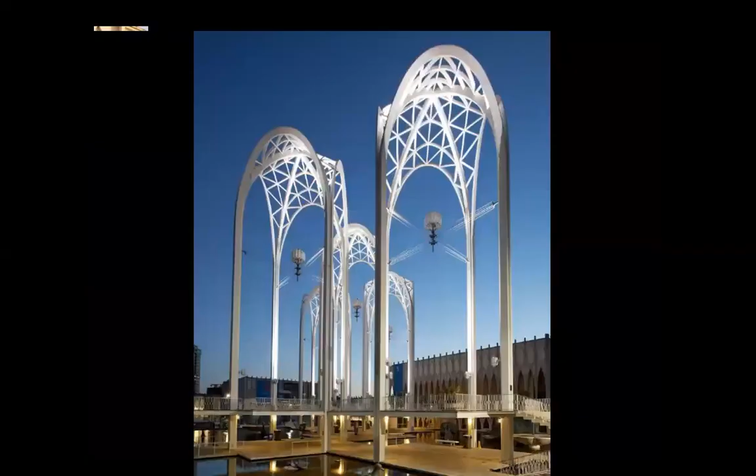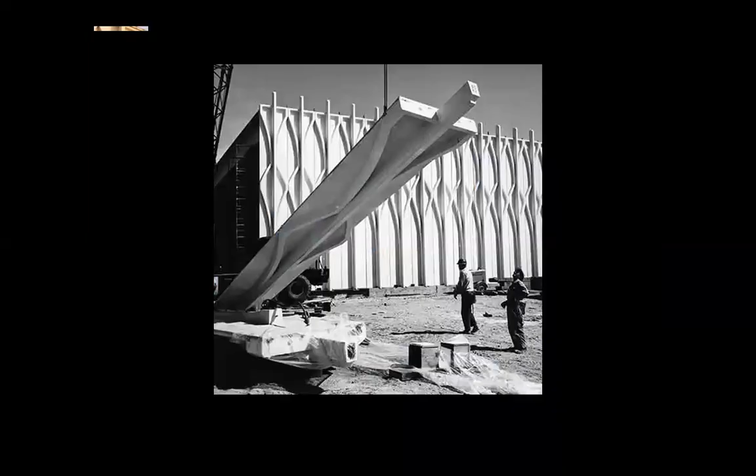And these strange things, how are we to interpret them? What do they mean? Could we call science the new cathedral or the new religion? Did Minoru Yamasaki think of these matters? I don't know. Anyway, he built them. You see, they are prefabricated. They are huge.

Also, I think it's worth pointing out that he was a modernist architect, or a modern architect, who didn't turn his back on ornament. Much of his architecture has a lot to do with ornamentation. And indeed, you cannot have structure without ornament. So he was a rather unusual modernist. After all, we read at the beginning that he was associated with a movement, the new formalism, not functionalism, but formalism. This is perhaps something worth thinking about.

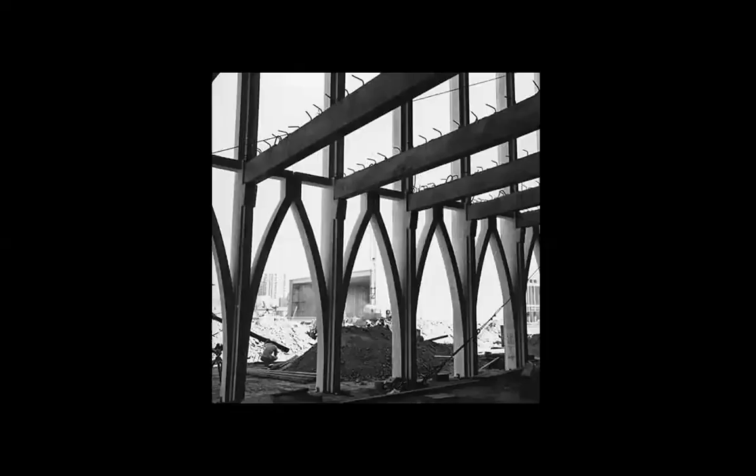In other words, he was a new formalist. Now, I don't know who the old formalists were. He was considered one of the new formalists, like Edward Durell Stone as well. Is there logic in his work? Yes, there is. But there is also the ornamental side of his work where logic becomes less adequate to use.

In the 60s, the United States was doing very well. There was some optimism that the United States is saved and will save the world, and the architecture had to be splendid. Although there was and will be a lot of poverty in the United States, these mega projects don't say anything about poverty, like that national life building project. Looking at that building, you'd say there's no poverty in the United States, but I lived there for many years and I know there is a lot of poverty. That poverty is not shown on TV, not shown through the red carpet of Hollywood or through the movies from Netflix or HBO.

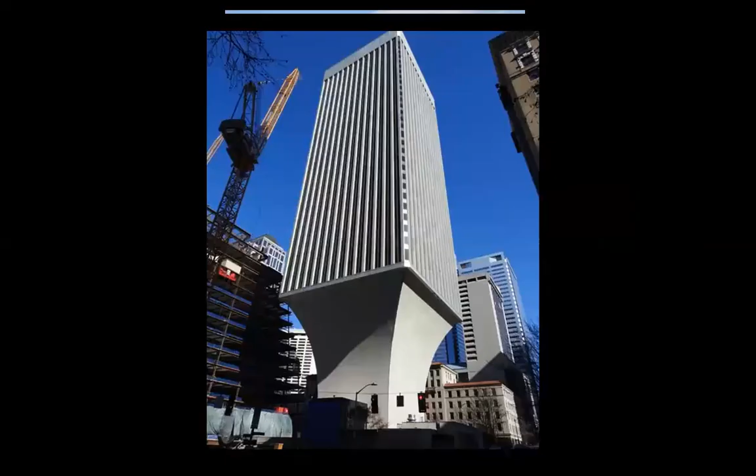The human beings were just small insects in their shadows. Rainier Tower, Seattle, 1977. This one at least is adventurous at the bottom, maybe too adventurous. I'm sure certain engineers in our country, and maybe not only in our country, would protest. But anyway, he elevated this huge prism on top of that base, which is kind of a pedestal that could make one tremble a little bit considering the scale. A strange building, really, by all means.

Because usually at the low level, you try to open up towards the street, towards the life of the street, towards people. But here, this pedestal, at least from this level up, is opaque. I don't know, it's strange, and obviously it requires some engineering acrobatics. He did it, because the triumphalist ideology of the United States at that time was almost without limits. So all the money in the world was there, and why not build in this way? But it does look strange.

You look at this first floor or ground floor, which is so pedestrian and dwarfed by this massive thing. This is truly huge. And then the true hugeness happens from here upwards. Very, very strange buildings. I wish I had more pictures to agitate me even further.

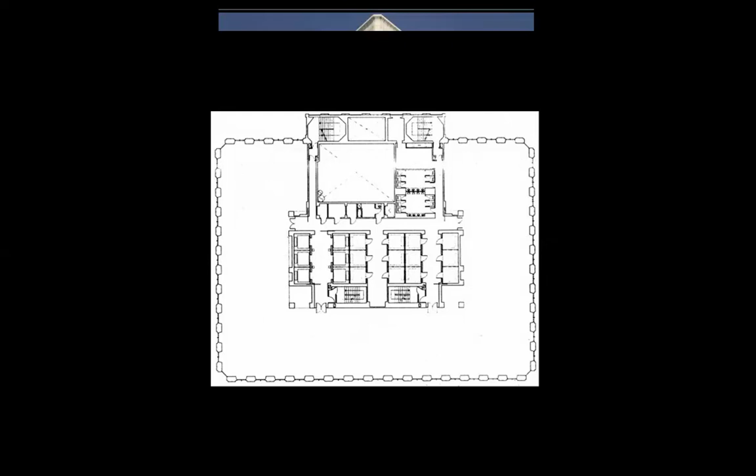The plan, as I said, is the typical office tower with circulations in the center - elevators, restrooms, staircases, and so on.

I was surprised to read a few days ago that Thom Mayne, the celebrated North American architect who was the founder of his office, Morphosis, stated in an interview that he seemed rather sympathetic towards the terrorists. This surprised me. We're talking about a winner of the Pritzker Prize, a very well-known North American architect, claiming that he doesn't lament the falling of the towers. In a way, he shows some sympathy towards what we call the terrorists stood for.

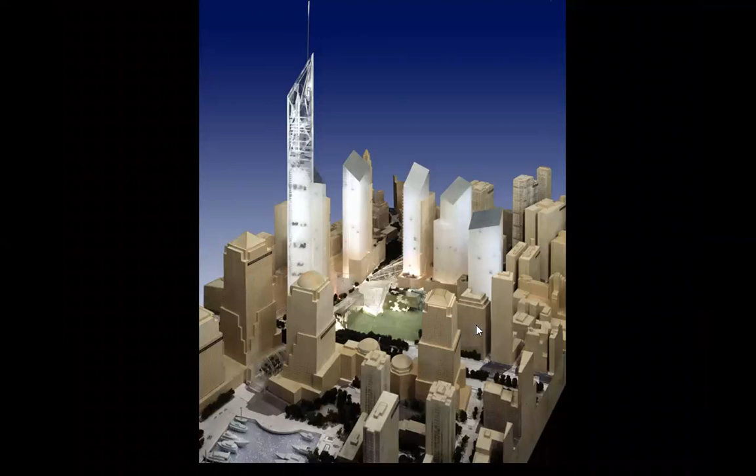Who would build something like this for nothing, in a way, meaning a useless giant pair of structures. Now, this might have been, yes, this one by Daniel Libeskind. He won the competition, but it was not built what he proposed.

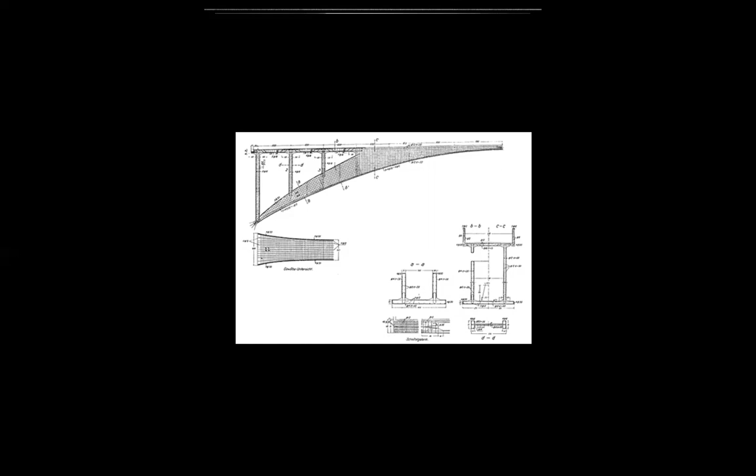Some drawings of Robert Maillart. Engineering drawings, very elegant, because his works are very elegant, very aesthetical. It's where engineering becomes art. And if they were also accurate in terms of calculations, even better.

I had a chance to meet here on Zoom in 2020 a very interesting structural engineer from the United States, from Los Angeles, working for OVE Arup America, Bruce Danziger, and we became friends here on Zoom. A very knowledgeable man about architecture and culture in general, and very sensitive. He worked with some of the best architects in the world for some very important works. Bruce Danziger, yes. I should have invited him today. Although in Los Angeles now it's maybe 9 or 10 a.m. at the most.

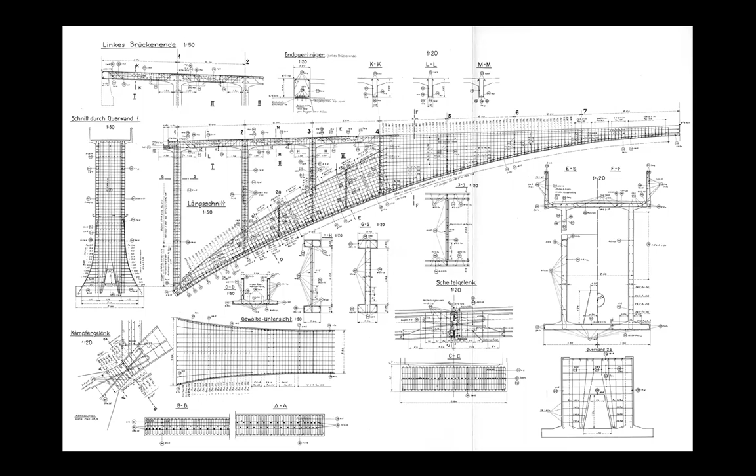Robert Maillart, a sensitive engineer. And we need sensitive engineers, and maybe we need even more sensitive architects. Tavanasa Bridge.

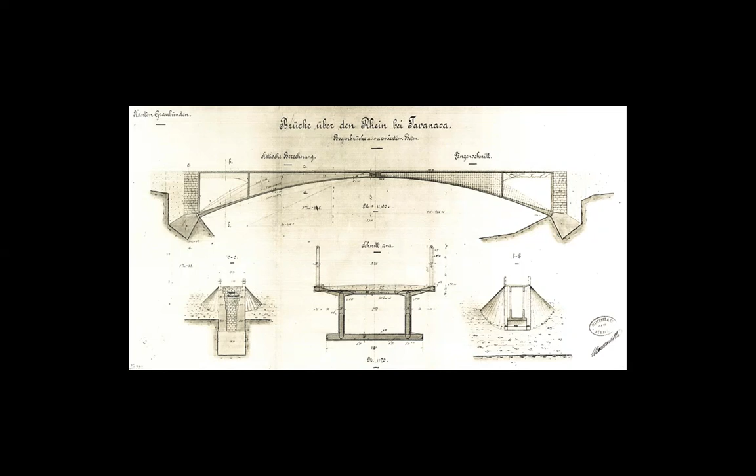Of course, at that time, they didn't employ computers. It was all done manually. Look at the handwriting. Who would write like this on not just an engineering plan, but architectural as well. And yet, forget the font, forget the writing. Look at the work. The built work is resolutely modern, by today's standards as well. The tumultuousness of what's underneath is balanced perfectly by the elegance, the Apollonian beauty of the bridge.

So when the engineer is coupled with a sensitive eye and a sensitive soul, you get such works. Good engineers don't like banal structures. Good engineers, like good architects, want adventures in their field. They want to create something new. So what is new usually requires additional effort, sometimes troubles, rejections.

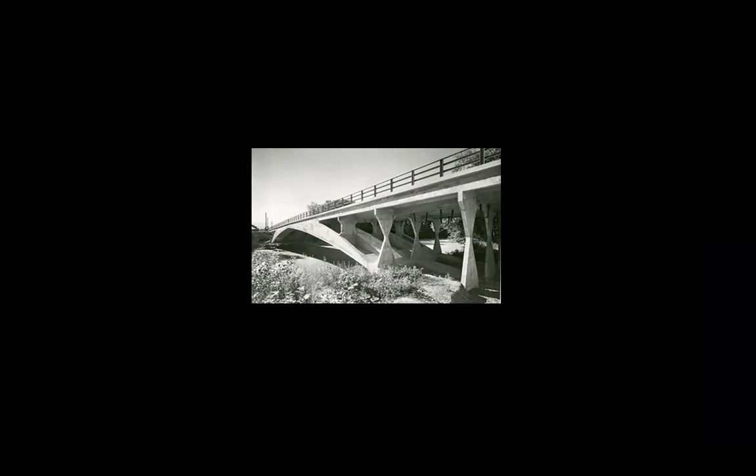It's unavoidable. Another bridge, Arve Bridge. I don't know if it's in Switzerland or not, but even here we see the appetite for aesthetics. Look at those columns. There is complexity here, and there is an artistic complexity. You would say, when you look at this work, that here you had an engineer, but also of course you had an architect. No, in this case, the engineer was the architect. The engineer was the artist.

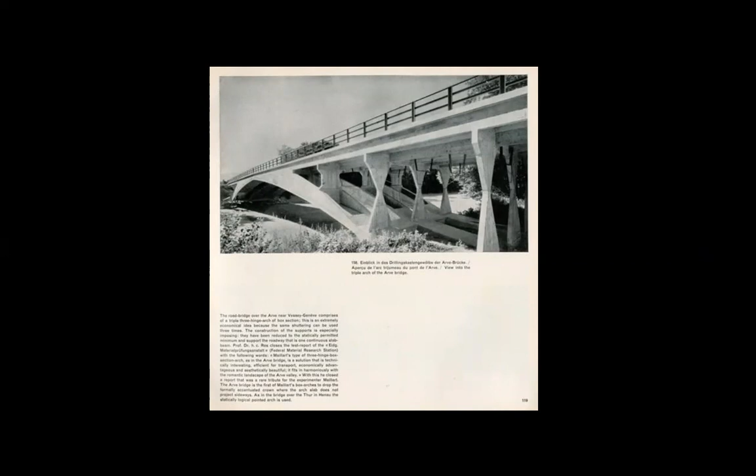Robert Maillart. I wish I knew more about engineering to analyze the work, but I don't. I am very badly equipped for this kind of analysis, but I can appreciate it artistically, aesthetically, very much so. It's literally a sculptural work that happens to unite the two sides of a river. I think Brâncuși should have loved it too.

And by way of bridge, I keep saying that the oldest definition of art that I found, in Proto-Indo-European language, art, as I read in English, art equals bridge equals God. This was the oldest meaning or definition of the word art that I found. Art equals bridge, like Maillart's bridge, and by extension equals God.

Another bridge. I don't know where this is, but he was the king of bridges, no doubt. Just as Hans Wegner, the great Danish furniture designer, was the king of chairs, Maillart was the king of bridges.

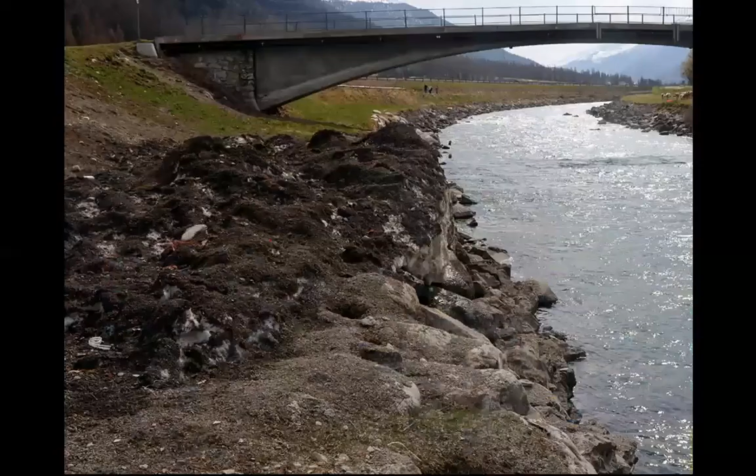Another bridge. We remember a few days ago I made a presentation on a Dutch architect who built many bridges in Amsterdam, but without exceptional engineering works. I'm talking about Piet Kramer. He built bridges as an architect, but from an engineering point of view, they were not exceptional. Here we have an engineer who built bridges with aesthetical virtues, with architectonic qualities.

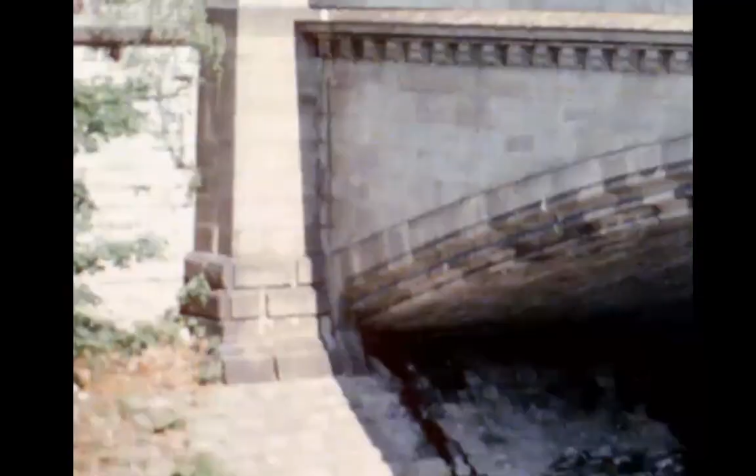Now this one is more historicist. Maybe it was an earlier bridge by Robert Maillart, it's possible. Or maybe he was required to make it historicist, it's possible. As I said, he was 15 years older than Le Corbusier, so he was born close to the turn of the 19th century. Now I don't know, was this built with stone or was it covered with stone? Because the structures we saw earlier were built in concrete, but here there seems to be stone.

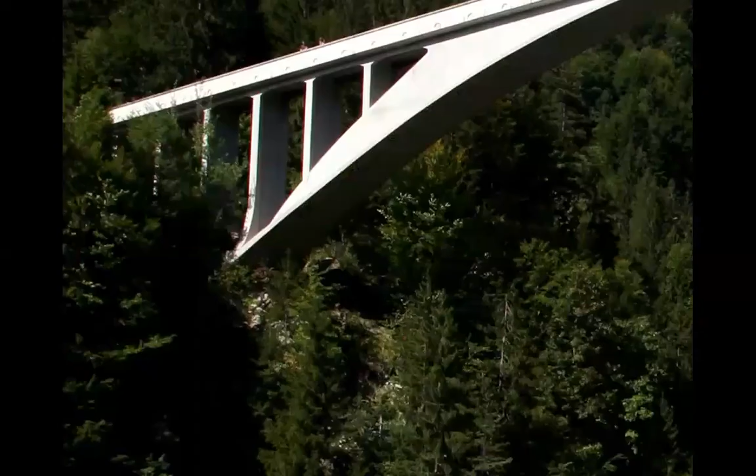Another bridge. We start with nature, and here it is. This is probably one of his best bridges, if not the best. It's truly flying between two sides of the mountain. It's formidable.

To be honest with you, if I was the engineer choosing to work on this bridge without being tested prior to being built, I would be a little bit afraid. But he probably trusted so much, not just his calculations, but also his instincts, that he didn't have troubles walking on his creation first.

Very interesting detail, no? That he tested the bridge himself. Now, of course, his weight was not so remarkable. So maybe the true test came when vehicles and Putin's tanks arrived. Let's hope the Putin tanks will never arrive in Switzerland. Let's hope they would not have arrived in Ukraine either, but they did, unfortunately.

Yeah, it's a glorious bridge. It is. Let's see how it is called. I don't know how to pronounce this. Salgina Tobel Bridge, I guess something like this. Salgina Tobel Bridge in Switzerland, by Robert Maillart. One of his best.

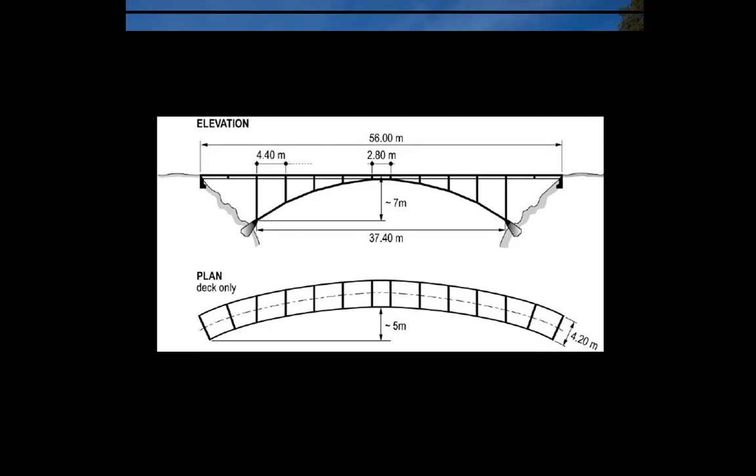Again, this was Schwandbach Bridge, Switzerland. This one is not so spectacular as the previous one. The previous one was also enhanced by the landscape, very dramatic. But this one, on the other hand, is curved in plan, which I guess created an unusualness here.

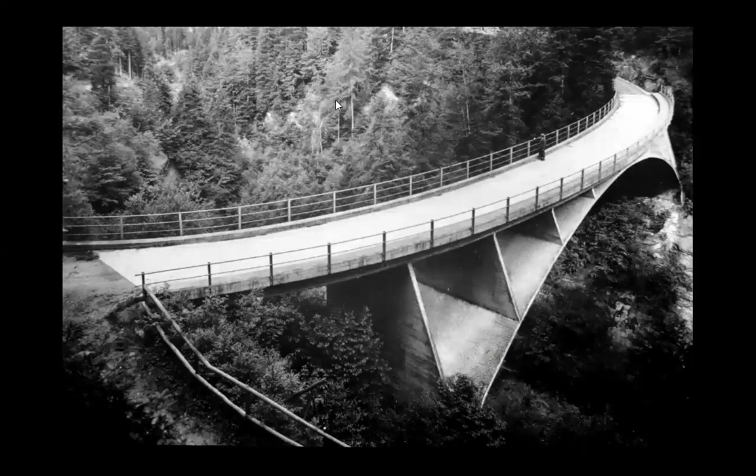I almost felt like saying that Robert Maillart was better as an engineer than Minoru Yamasaki as an architect, because this arch made me think of that building I showed by Minoru Yamasaki. But here the arch is not academic, it's not decorative. Yes, it has willed shape, but I don't see it being informed or affected by academicism. As such, I think this work is superior to that work by Minoru Yamasaki. And yet we cannot say that Robert Maillart was not an architect, because this bridge has important aesthetical virtues, and he employs that arch without the weight of historicism.

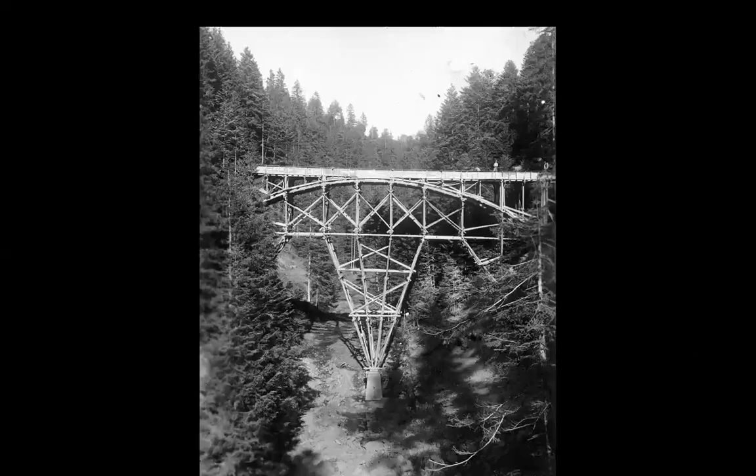And even during construction it is magnificent. I like this picture. I mean, even the scaffolding has aesthetical virtues. And of course, the Swiss build impeccably. Well, not always—some of the buildings built by Peter Zumthor are not done impeccably at all. But that's because of the architect. What the Swiss build, they build very, very well. Whatever they do, they do very, very well.

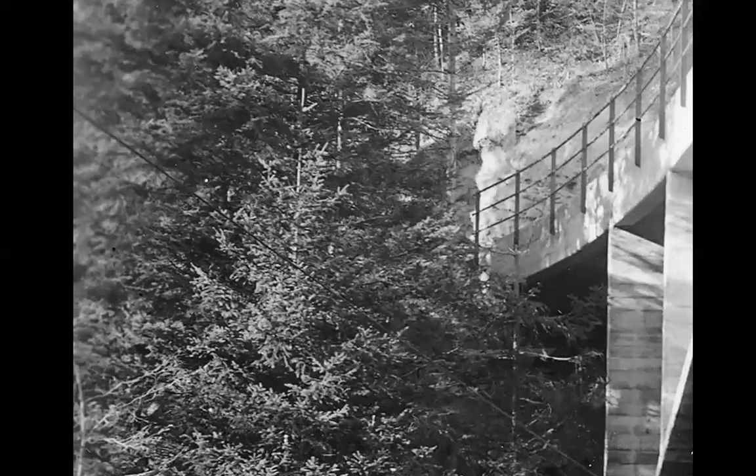Interesting bridge because it is curved in plan. Is that the engineer seen from behind? Who knows, maybe yes, maybe not. It is impressive. I mean, most of these pictures show an impressive work.

Another bridge, Bohlbach Bridge. This one curved as well, but smaller. Another one. They seem to employ the same principles. So I guess he found a way to build these bridges, and he built a number of them in the same way.

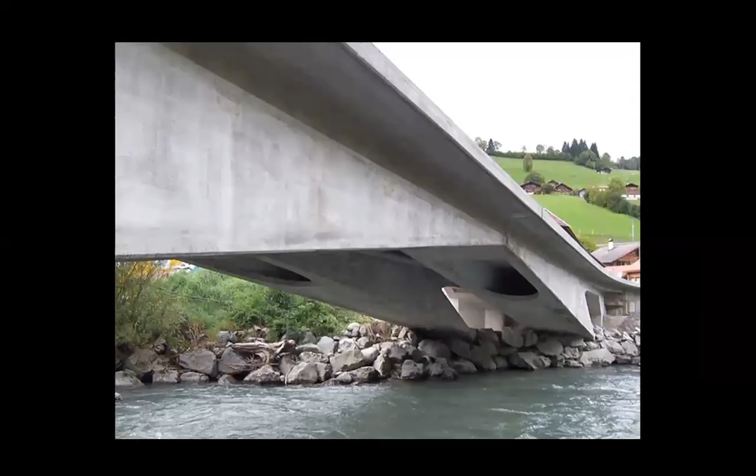What is this? Another bridge, Brücke. Maybe this is, but who knows, maybe still in Switzerland. Almost futuristic. It has a dynamic quality that makes one think of futurism. Now look at this shed or house here—it has nothing to do with this bridge. This bridge belongs to the future, this house belongs to the past. It only shows how innovative Robert Maillart was.

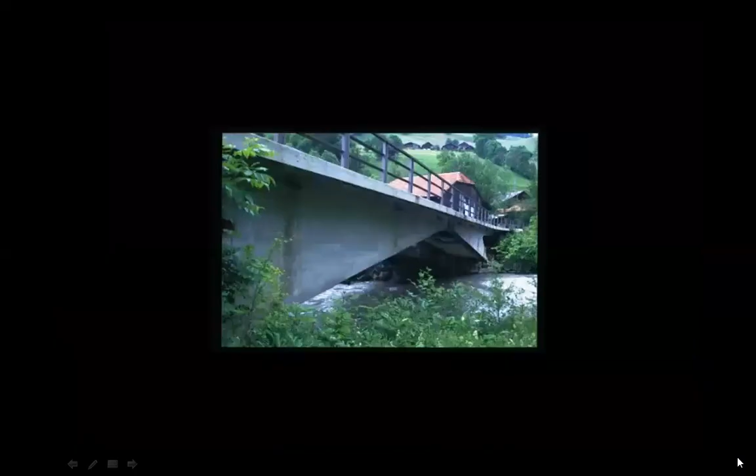But too many bridges. I wish he built other things as well.

Those legs, the bridge made me think of the curious arches or legs, I don't know how to call them, that Le Corbusier and Iannis Xenakis employed at La Tourette Monastery in France. I don't have the means right now to show a picture of what I'm referring to, but somehow the idiosyncratic choices of Le Corbusier and Iannis Xenakis stand in contrast with the logical beauty of these concrete legs that Robert Maillart employed in this bridge.

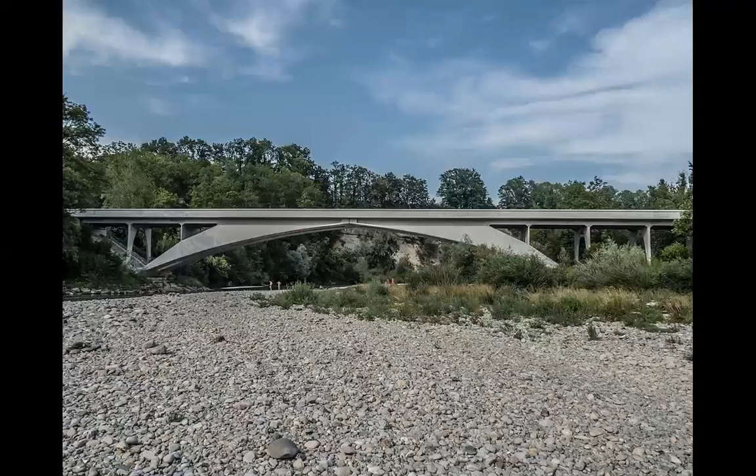They're artistic works in a way. They are sculpture. Yeah, he had an artistic side to him, no doubt.

Maybe we can reposition the terms of that triple equation: art equals bridge equals God. Maybe we could say bridge equals art equals God as well. Could we also say God equals art equals bridge? I don't know. Or maybe we could say art is a bridge between man and God.

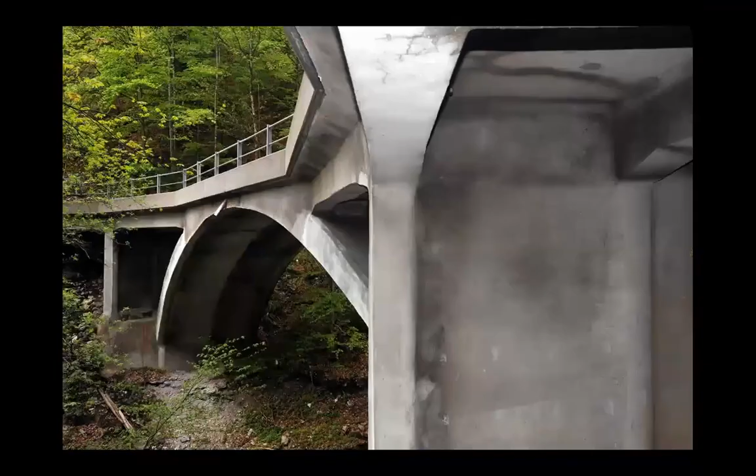Too many bridges. I wish he built other things as well, not just bridges. It's getting a little tiring for me, sorry. Particularly since I don't have the tools to analyze them from an engineering point of view, I just contemplate them with my eye. Other structures, that's good.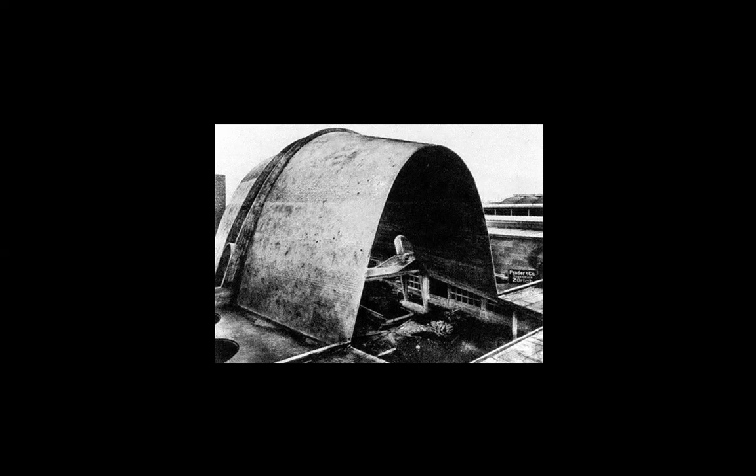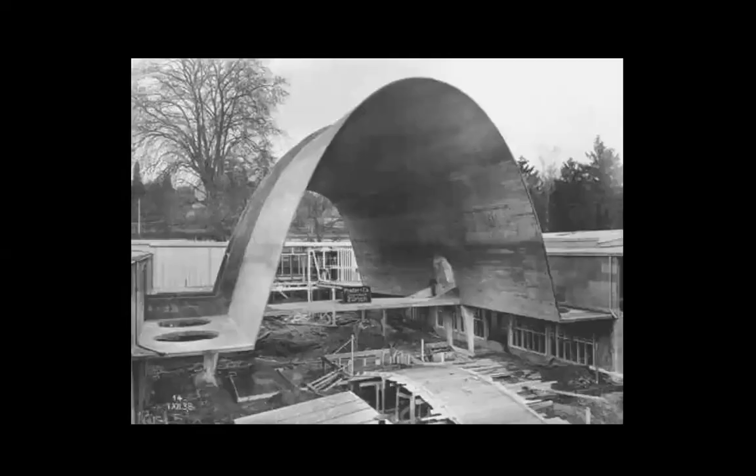So let's see a few other structures by Robert Maillart before we leave him. Cementhalle, a factory for cement. Now I am beginning to be re-energized because I like what I see. It's not a bridge. Look at that shell, the reinforced concrete is so thin, incredible. I don't quite understand what is happening because of the lack of quality of the picture, but even so it is remarkable. Yes, the thinness of the reinforced concrete is remarkable.

So he built a few other things besides bridges. What is a music pavilion? This one a little bit whimsical, but interesting. A little bit heavy, but interesting though. Clearly, he was an architect here. Robert Maillart.

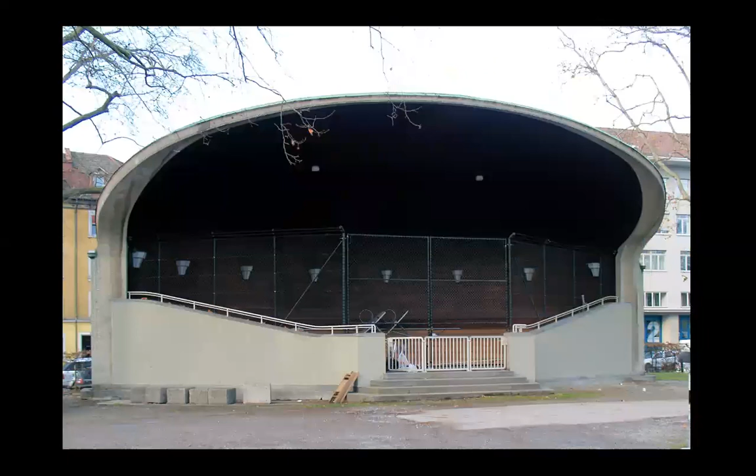Here, the structural efforts are those that dictated the form, and it's not just a form, I think. Elegant and stable. Structural elegance. Maybe some kind of an industrial space. It looks like some kind of a factory with some offices. But these columns are very elegant indeed.

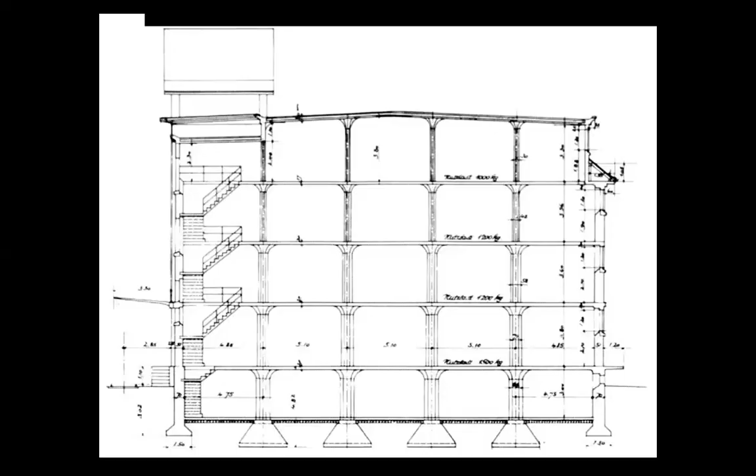Also, you see there are sophistications here which were probably justified by structural reasons, where the columns are thicker at the bottom and become narrower and narrower towards the top. So there is also an organic quality in this structural work. It's not rigid. It's not as rigid as a less skillful engineer would have done, where at the lower level it's like this, and at the higher level it's like this.

The forest of columns, as Hölderlin would have called it, the forest of columns, and they do have nobility, these columns. Concrete through and through, from top to bottom and from bottom to top.

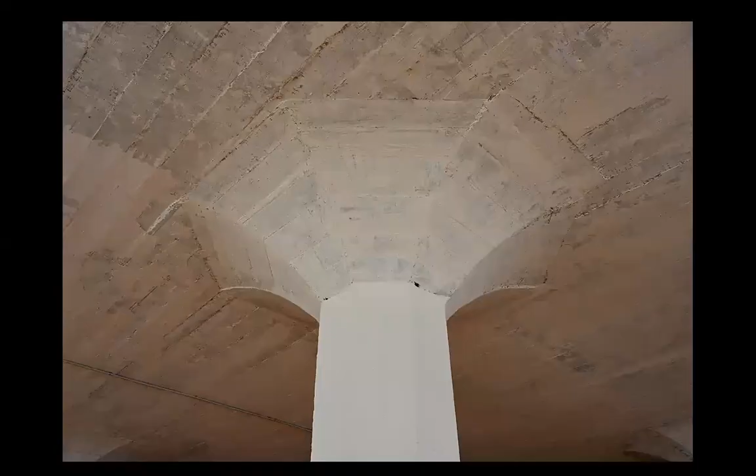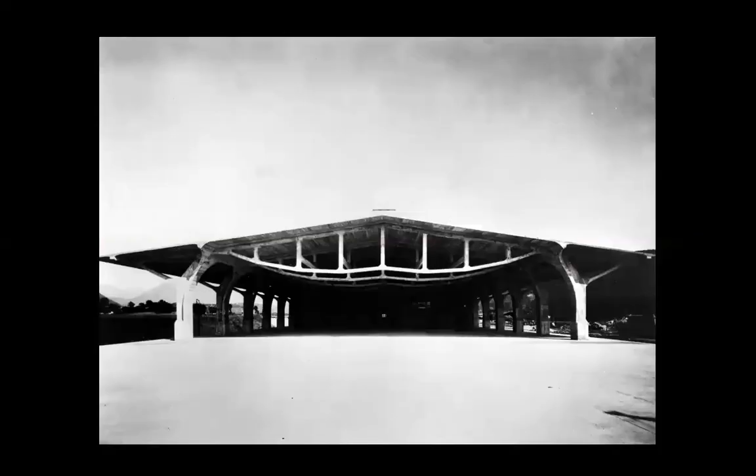I don't know exactly the function, but the structure again is very elegant and even more dramatic.

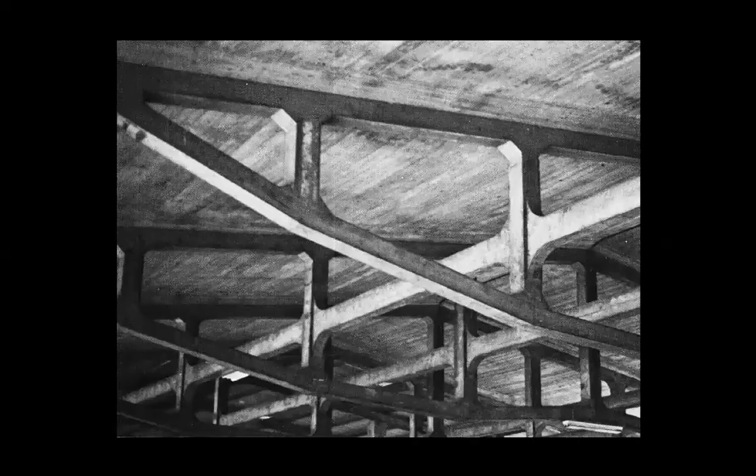Concrete can be beautiful indeed, but what can we do? Concrete pollutes. So we have a dilemma these days. Can we renounce the services of concrete? In terms of pollution, it's not a sustainable material, but it has qualities. It affords a large variety of expressions, but it pollutes. Concrete pollutes. At that time, there was no concern with this, but today we do have to be concerned.

I like this pavilion or whatever it is very much, this structure, this warehouse or whatever it is. Look at the structure, it's magnificent, and it is magnificent because it also has aesthetical virtues. It also has ornamental aspirations in a way. It's not just about the measurableness of transmitting the efforts from top to bottom. It's also about beauty. And it is not a beauty that is added to the structures, it's intrinsic to the structure.

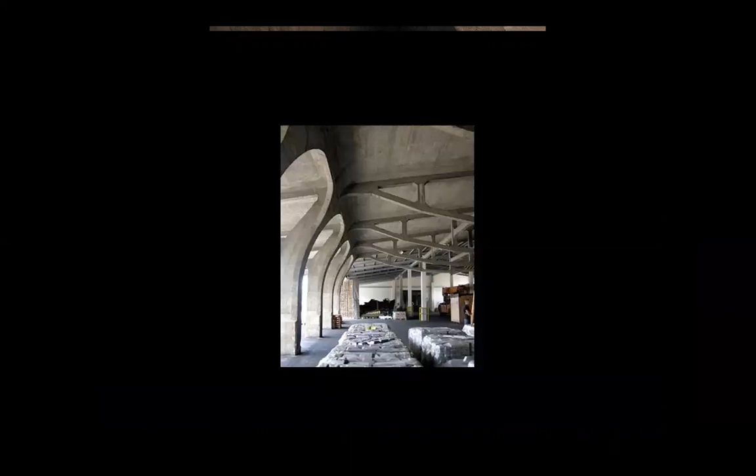Maybe something like this Antoni Gaudi would have done if he was an engineer and not an architect. If I am to express myself a little superficially, this architecture has a certain organicism that you would not easily expect from an engineer.

That's it. So let's wish him happy birthday for today and for the 16th of February, if he was born on the 16th and not on the 6th of February. Thank you for being here.